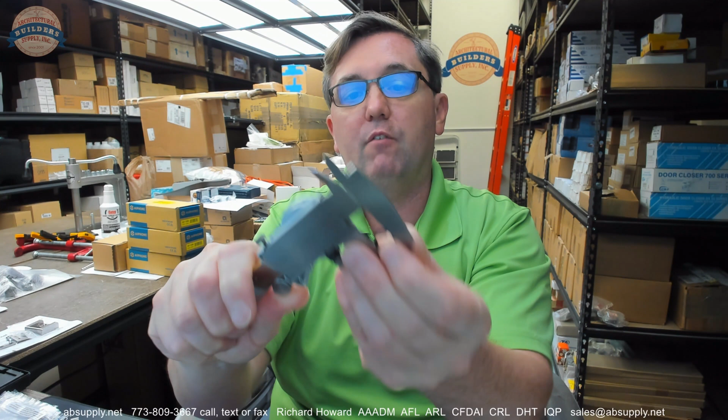Let's take a couple of basic dimensional properties on this. Overall length of the shear pin, 0.607 overall length. Now let's take a look at the diameter, 0.182, and then the dimension across the flats there, 0.186 by 0.186. The ring itself, the Truarc ring, has an outside diameter of 0.507.

Let's switch to the screen view where we can take a look at some of the manufacturer's supporting documentation. This is indeed the item that we're looking at here, and what we'll do is click on the link to the manufacturer's page, and from there we're going to be able to open up the parts manual that's here.

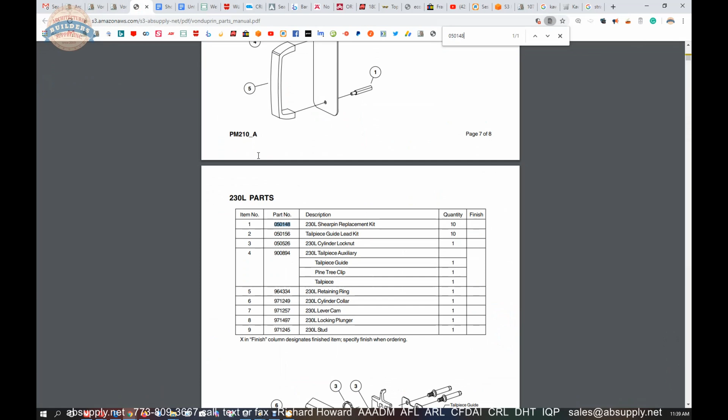Let's go ahead and do that and let that document load. We'll do a find function for 050148, and it will come up one time in that 400-page document, and it'll be part number 1, which is the shear pin that's here.

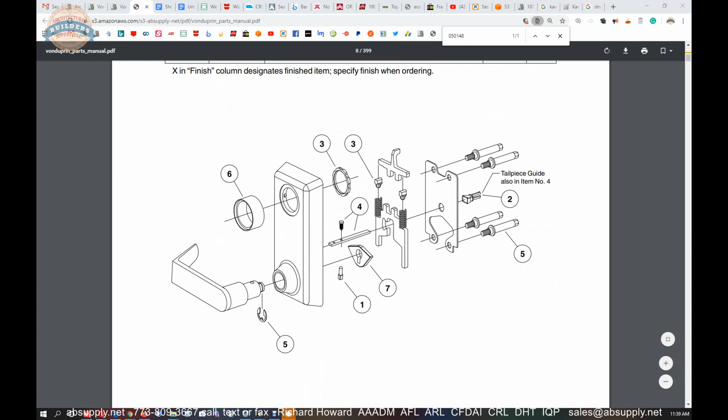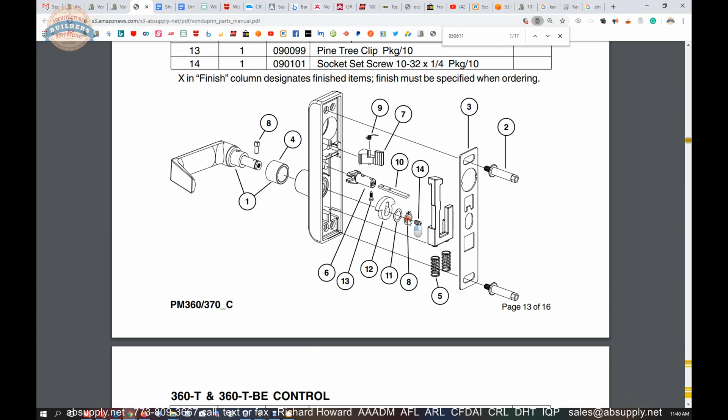So let's go back and look at the 050148. Now when we pull up that 050148, it does show up as part number 5, retaining ring.

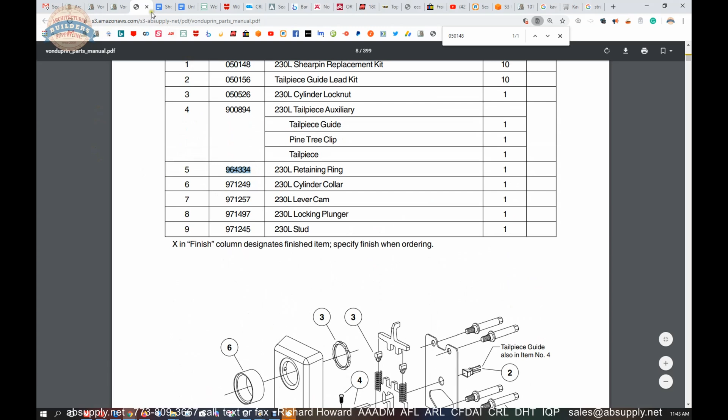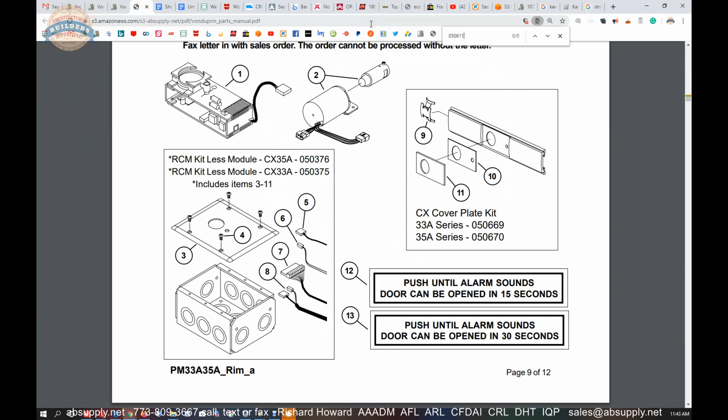It's a separate part. So what the factory has inherently sent us is the 050611, and the reason we're using it in this video is because it serves as a legitimate part number to do the job of the 050148. So the 050611 does show you part number 8. It's all there, that shear pin.

Obviously, if you put enough force onto that lever, the shear pin's going to let go. And someone has ordered 10 packages of the material, in fact. It would be very typical and common that you would end up needing these parts.

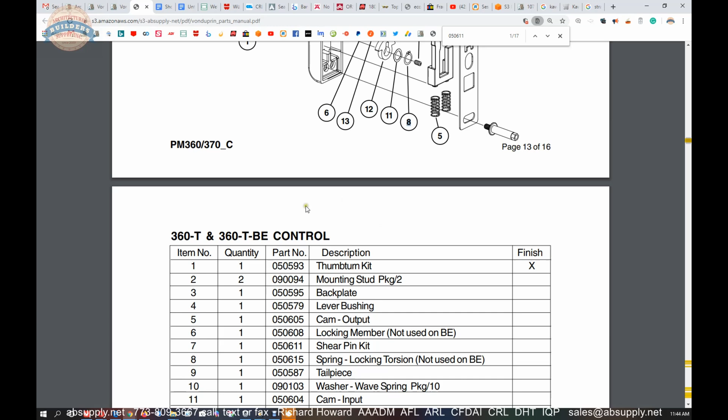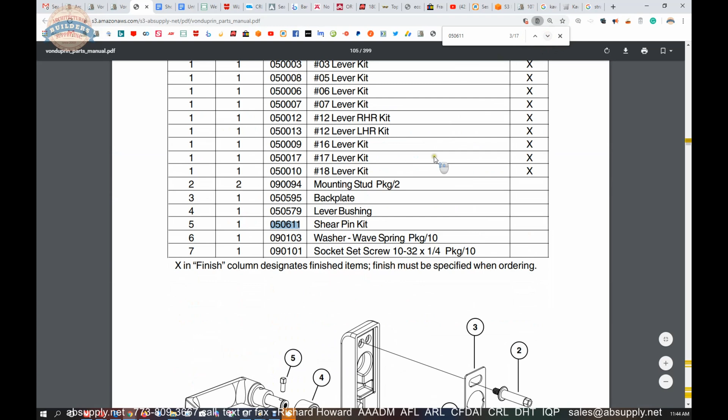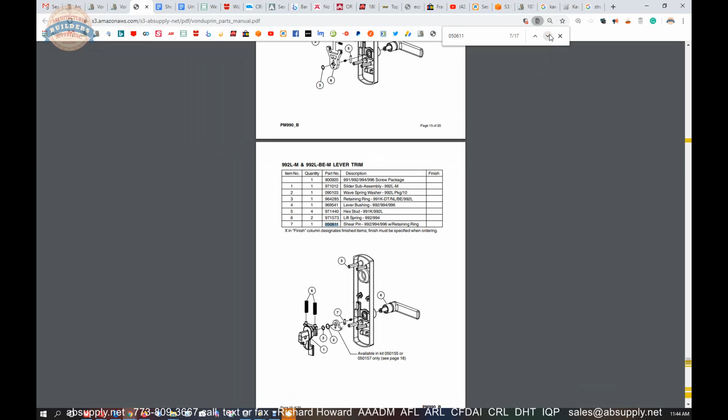But let's go through the other areas in which it's used. It's clearly used in the 360L and the 360LBE, the T and the TBE as well, the DT trim, the E360L, the 992L for rim and vertical rod, the blank escutcheon rim and vertical rod, the mortise version, the 994 rim and vertical rod, etc.

So this part is used in many other units. So since we have the manufacturer's page open, let's go back to our root item. Here's the item that we're looking at.

Manufacturer's page - this is the repository page of all things Von Duprin. Not only a link to all of the Von Duprin products that we sell, but also a link to the manufacturer's website as well as a link to the full product catalog. But this is where we'll find the parts manual.

This is where we are going to find an overview of their electrified hardware, their electric strikes. Von Duprin makes a very nice line of grade 1 electric strikes, and other encyclopedic references that are here.

Let's finish up this video on camera. In conclusion, I'm quite partial to Von Duprin, and it's because they do a really exceptional job at not only publishing their parts drawings, their part numbers, having access to the material in stock is generally very good, and their technical support is superior. Von Duprin is under the umbrella of Allegion.

Their sister companies would be LCN, Schlage, Glynn-Johnson, Ives, Falcon, Dor-O-Matic, Zero, and other companies. They do a good job with their exit devices from Von Duprin. They have their 22, which is where possibly this client's using these.